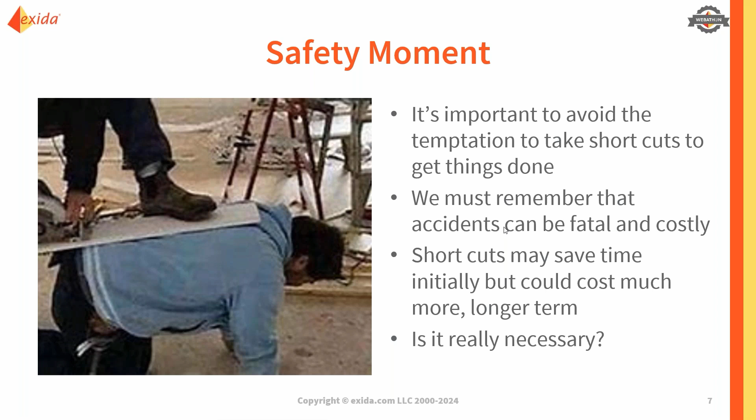And oftentimes I come across this a lot, where people are trying to save money and thinking that they can cut corners, they can delay doing the maintenance, delay doing the proof testing, and all of that, because they think, is it really necessary to do that? And the trouble is, it is necessary to do that if you want to maintain your risk.

So, coming on to the main point of this webinar today, another question I often get asked is what is mission time? What do we mean by mission time? Mission time is sort of a throwback from the Second World War, where when the bombers needed to go off on their missions, the engines had to be reliable enough to carry them there and bring them back. So this concept of mission time has stuck.

And from the 61511 point of view now, we require that the time we expect a set of SIF equipment to work before a major overhaul or replacement needs to be stated. And this is what we refer to as the mission time. And the other thing is, the end user should be specifying what the mission time is, because it will be a factor involving their normal practices.

So what are the end user practices when it comes to the mission time? For example, it could be that they have a 5-year turnaround, and so you might set the mission time at 5 years, or you could set the mission time against your valves, for example. So if your major cost is the refurbishment or replacement of valves, then you might set it for that, which could be 10 years, for example. Others might say, well, we'll have to change out the logic solver in 15 years, so that's going to be a major change, so we should set our mission time at 15. Others arbitrarily set it at 30 years. But the point is, it's the end user that needs to determine that, and not the engineering company, because the end user has to obviously track and maintain that.

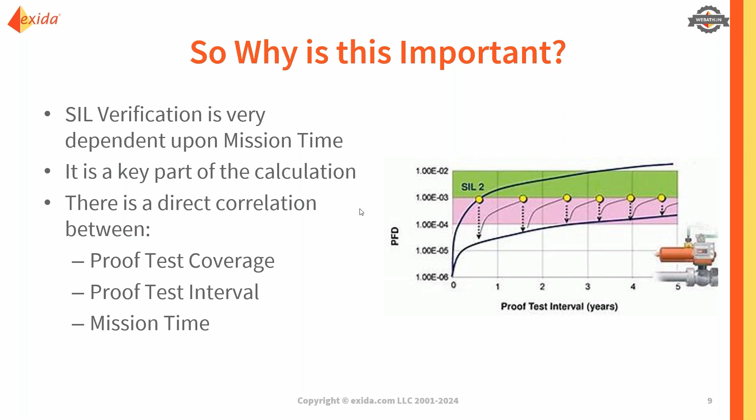So why is mission time important? It's important because SIL verification is very dependent upon mission time when we're not assuming perfect proof testing. And I'll talk about that in a minute. It is a key part of the calculation. And as we shall see, there's a direct correlation with proof test coverage. What we mean by proof test coverage is the ability of a proof test to help us find dangerous failures, the interval, how often we are going to proof test, in conjunction with the overall mission time. So like I said, SIL verification does depend on a number of variables. These three are part of that, and they're an important part of that.

So just to refresh our memories on what we mean by proof testing. The purpose of a proof test is to help us find any dangerous undetected failures that the automatic diagnostics have not been able to find. It's not to prove that the SIF works. And this is why it's very important that if you don't have a tool like exSILentia, which has this information in it, you need to look at the recommended proof test from the manufacturer.

Now, of course, a safety instrumented function is made up of multiple pieces of equipment, and those pieces of equipment will all have different requirements in terms of proof testing. So you need the safety manual, because the safety manual will have a recommended proof test to achieve a certain coverage for finding dangerous failures. So it's important that you have access to that safety manual. And very often when I talk to end users and even when teaching the classes, when I ask the question, do you have your safety manuals?

And some clients say, yes, we have the safety manuals, but others say, no, we don't. And the thing is, when it comes to certification, IEC 61508 specifies that there should be the proper end user documentation, which is a safety manual. The thing is, it doesn't necessarily mean that they will give it free of charge. And indeed, some suppliers will charge for certain portions of the safety manual. The safety manual could also be part of some other documentation as well.

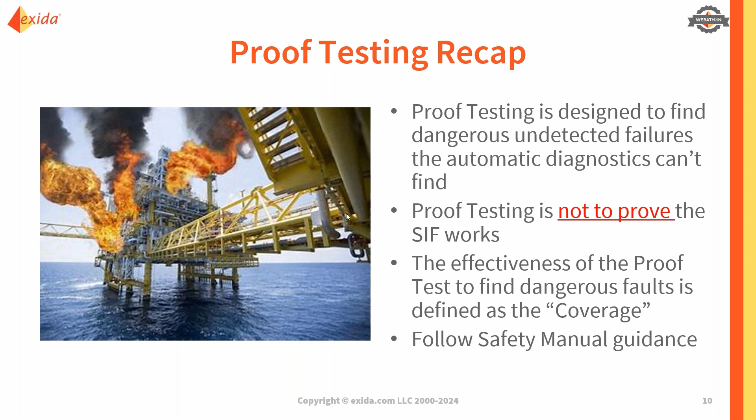But the point is that you have to make sure your purchasing people, when they order the equipment, also specify a safety manual has to be supplied. Because as I've said, we would need to study the safety manuals and come up with an overall proof test for the SIF based on the equipment that we're using. So this effectiveness, the proof test coverage, is referred to. That is how effective is our proof test at helping us to find dangerous failures. And as I've said, we need that safety manual to be able to follow that guidance. This is very important

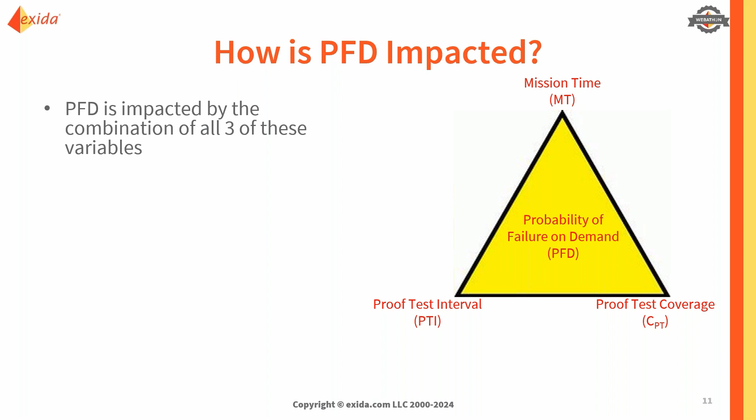because, again, coming back to my point about how is the PFD impacted by these three variables. Mission time in conjunction with the proof test interval, in conjunction with the proof test coverage. These three. And it will be impacted by a combination of all of these three. Now, if we consider the simplified equation for probability of failure, and this is a simple formula. During useful life, and again, as I've said, there's another webinar that covers the reason why we have to track useful life. But during useful life, we can claim constant failure, in which case we can say that the probability of failure for the SIF is going to be the failure rate times the time interval. So this is at its simplest form.

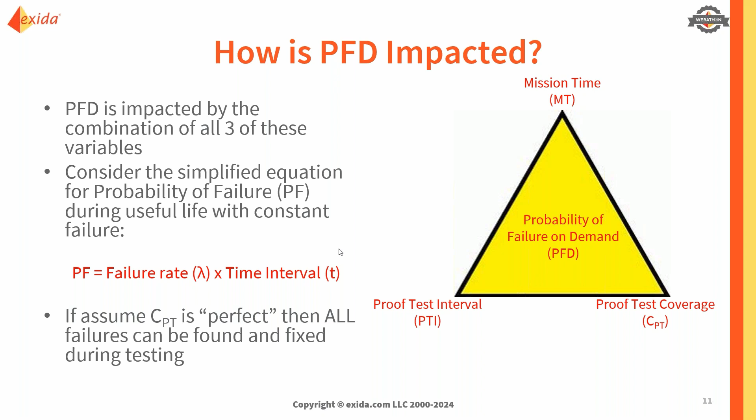And this is based on the premise of perfect proof testing. What do we mean by perfect proof testing? If we assume that the coverage for dangerous failures is perfect, then what we're saying is that we can find and fix all the dangerous failures during testing. This is a fallacy, of course. It's not possible to claim that we can find and fix all dangerous failures. And this is very important because if we consider perfect proof testing, it means that mission time has absolutely no bearing on it.

Because again, if our coverage for dangerous failures, which is obviously going to be a function of the dangerous failure rate, known as lambda d, then we simply would be saying that our PFD in this case, probability of failing dangerous, would be a function of lambda d times Ti. The mission time has no bearing, because what we're implying is if we can find and fix all the dangerous failures when we test, what does that do to our PFD? Well, it basically means the PFD is 0. We found and fixed all the problems, so we don't have any probability of failing on demand after each test. So effectively, we're resetting to 0 every time we do a test. So this is a fallacy, and it's completely unrealistic, because there's no such thing as a perfect proof test. And the PFD average, of course, which is half the PFD, would be the same, lambda d times Ti over 2 in this case, if we assume perfect proof testing.

However, if we come back to the real world, if our proof test coverage is not perfect, then we cannot simply say that our PFD is lambda d times Ti, or our PFD average is lambda d times Ti over 2. Because now we can't find and fix all the dangerous failures. So instead of returning to 0, the PFD will not return to 0. It'll be at some level above 0.

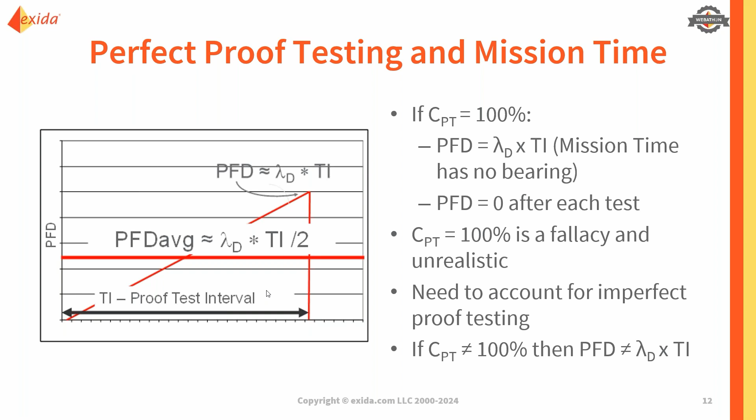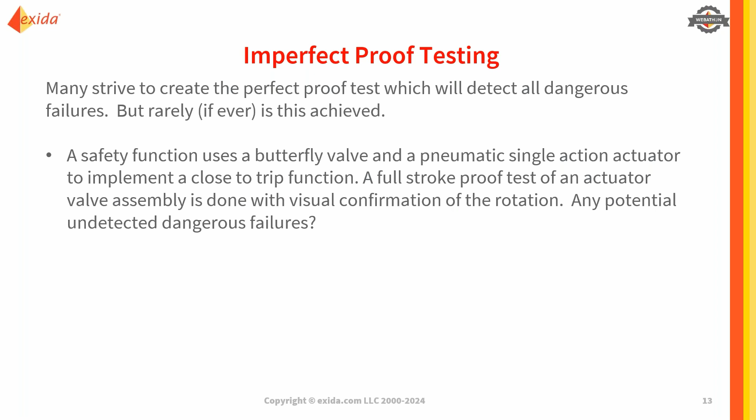And this is often a conversation I've had in the past with different clients. If you think of it this way, if we consider a safety function has a butterfly valve, a pneumatic single action actuator, and it's implementing a close to trip function, even if we do a full stroke proof test of the actuator valve assembly, and we confirm that there has been rotation, are there still any potentially dangerous failures? And of course, the answer is yes, there are, because we don't know what's going on inside the valve. There could be a damaged shaft, there could be damaged seals, there could be damaged butterflies. So we cannot say that a full stroke is 100%, and I have heard people say full stroke is 100%. There's absolutely no way you can say it's 100%. Because as we shall see, if you assume perfect proof testing, you're just fooling yourself.

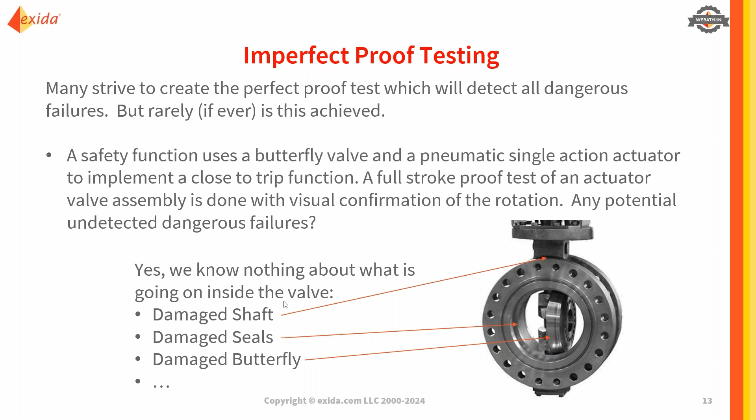So we know then, if we have perfect proof testing, that the assumption is the PFD will be 0 after every single test, and mission time has absolutely no bearing. But now if we accept the premise that there is no such thing as perfect proof testing, we have to consider the mission time. Because if our CPT is not 100%, then of course the PFD is not going to be 0 after the proof test has been completed. And therefore our simple formula has to account for imperfect proof testing.

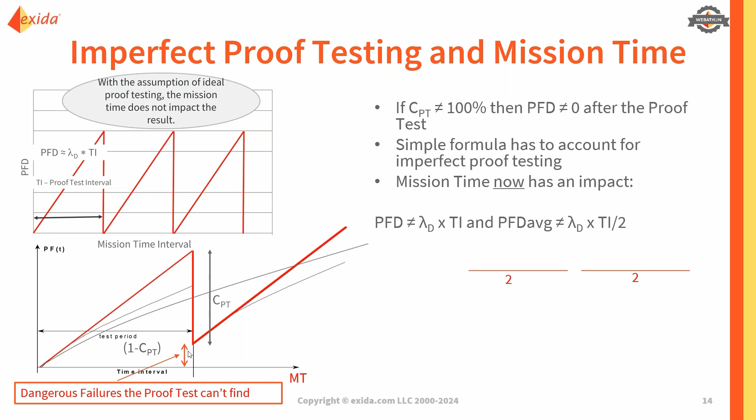And mission time now has an impact, because we can't say PFD is simply going to be lambda d times Ti, or PFD average is lambda d times Ti over 2. Because instead of it going back to 0, we're going to have a portion here that we can't find every time we do a proof test. And using our complement rule, if we said that the coverage factor was 80%, that means that we can't find 20% every time we test. So this will be dangerous failures that the proof test can't find. So now we have to account for that. And this is going to be cumulative over the mission time.

So it's no longer simply going to be lambda d times Ti over 2. We have to take into consideration the coverage. So the dangerous failures we can find are governed by CPT times the dangerous failure rate times the proof test interval. But now we have to add in the dangerous failures we can't find, which is governed by 1 minus CPT, over the mission time. So now we have to include the mission time. So you can see mission time now will have a direct bearing when we don't have perfect proof testing.

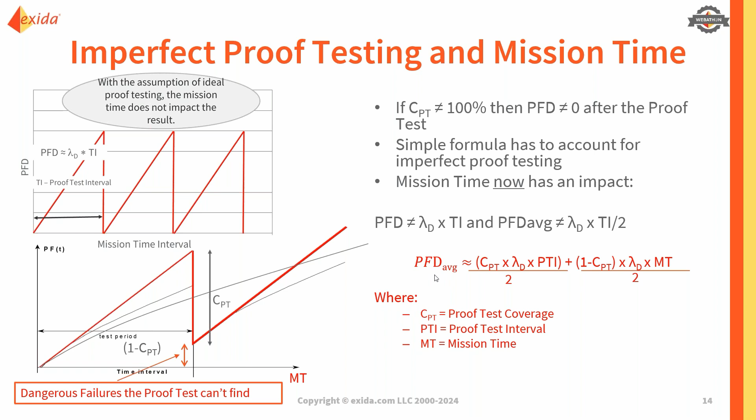So to illustrate that, let's consider a simple example. Let's say that lambda d is 2 times 10 to the minus 7 failures per hour, or 200 FITs. Our proof test interval is 10,000 hours. In this case, we're saying our coverage is 90%, and our mission time is defined as 200,000 hours. So, using our simple approximation equation, we need to compare the result with the perfect proof testing. So, of course, if we assume perfect proof testing, we've got the same failure rate. We have a test interval of 10,000 hours. Our CPT now is 100%, and our mission time is still 200,000 hours.

So let's look at the first. Using our simplified formula for imperfect proof testing, where we're taking into consideration the failures we can't find, we plug in our numbers. So we have our coverage factor, which is 90% or 0.9, times the failure rate, which is 2 times 10 to the minus 7, times the test interval, which is 10,000, or 10 to the 4. So the 2's will cancel here, and 10 to the minus 7 times 10 to the 4 is 10 to the minus 3, so it's going to be 0.9 times 10 to the minus 3 on this side. Over here, we have 1 minus 0.9, which of course is 0.1. The 2's cancel out again, so now we've got 0.1 times 2, which is 0.2. 10 to the minus 7 times 10 to the 5 is 10 to the minus 2. So now we have 0.002. And if we add those two together, we get 0.0029. And if we invert that to get our RRF, so RRF is approximately 1 over PFD average, we get 345, which would say this was a lowish SIL2.

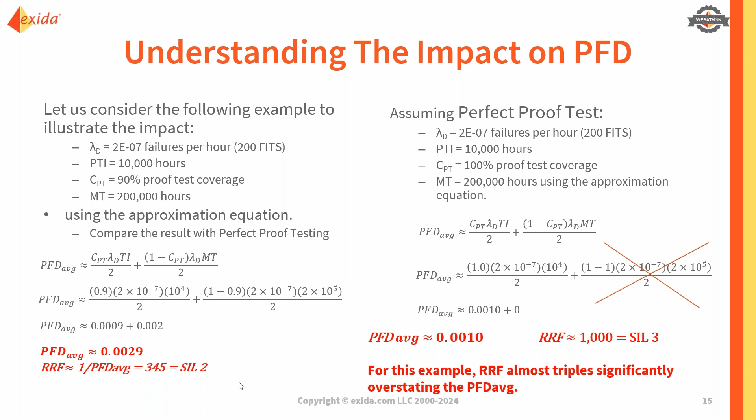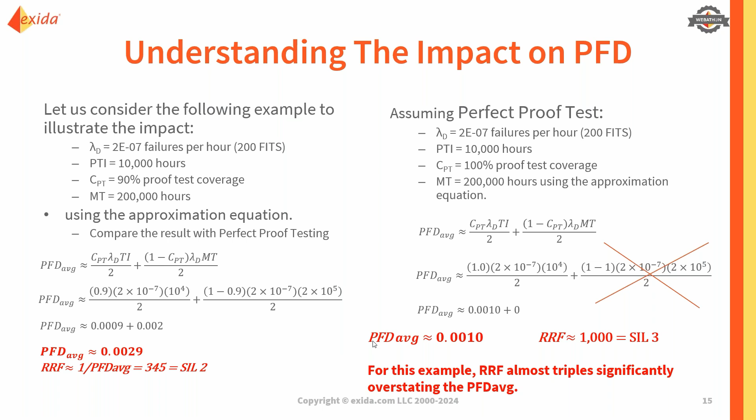So you can see, and this is the difference between 90% and 100%, which is only 10%, we're almost overstating our risk reduction factor by 3 times. So this is why I say, if you assume perfect proof testing, you're just fooling yourself, because you're overstating the risk reduction you can achieve by not using realistic numbers. And you can see here, almost 3 times. Why would we want to do that? We're just completely overstating the amount of risk reduction we have. So this is very important. So we need to understand that.

Let's take another example. Let's just assume a very simple high pressure protection SIF, which is simply going to be a pressure switch, solenoid valve with a manual reset, an actuator and a ball valve. And let's say the SRS requirements were for this to achieve a SIL2 with a risk reduction factor of greater than 110. And in this case, we're setting the proof test interval at 3 years, which is fixed based on the plant turnaround.

The mission time is defined as 30 years. We'll use a 90% coverage factor. There's a manual reset and it's hardwired, so there's no logic solver. So this is fairly simple and straightforward.

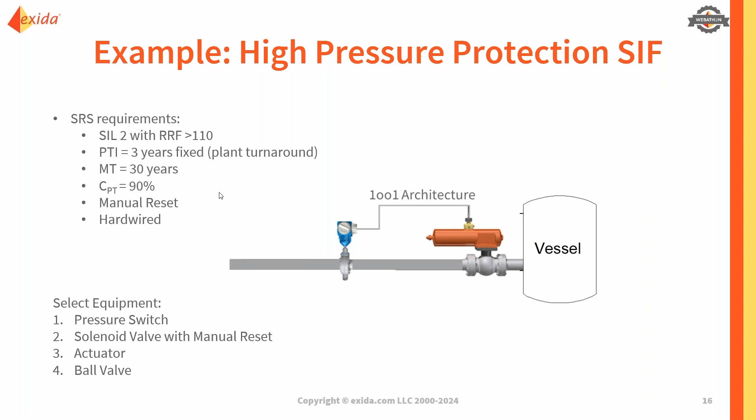Now, if we look at this in exSILentia, the mission time becomes an important part of this with imperfect proof testing, as I've said. And here you can see there's our mission time of 30 years. So the SIL target is SIL2 with an RRF of 110. Now, based on this design, we can only achieve a risk reduction factor of 35.9. So we're well off our target. And you can see over here that the final element is the main contributor to the PFD average because we're using a single set. So this is where we would obviously need to focus our attention.

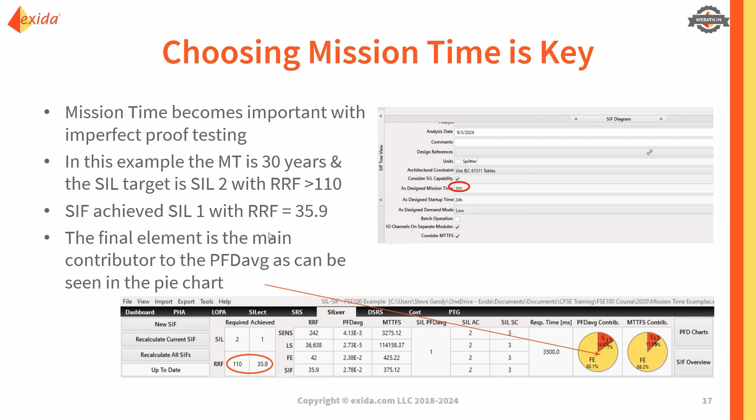So in our example, we have a fixed 3-year proof test interval that's set by operation, so we can't move that. And here again, I always tell designers, don't design in isolation. You need to go and talk to the O&M guys and find out what the end user practices are. We had a case where a client came to us because in order for the engineering company to meet the SIL target, they had set the proof test interval at 3 months. And of course, the end user said, there's absolutely no way we can do 3 months. So we need to make sure we understand the operating conditions and of course the practices.

Even with a 90% coverage, we can't meet target. So what are our options? We could look to increase our proof test coverage, but at 90%, the chances of improving it significantly are not going to happen. We could include partial stroking. Now here again, when we are considering low demand operation, and especially with the final elements, we are concerned with failures such as stiction, cold welding, binding. All of these are dangerous, especially when the valve isn't moved for long periods of time. So if we can move the valve, even a little bit, we know it's not stuck. And that can obviously alleviate quite a few of the dangerous failures.

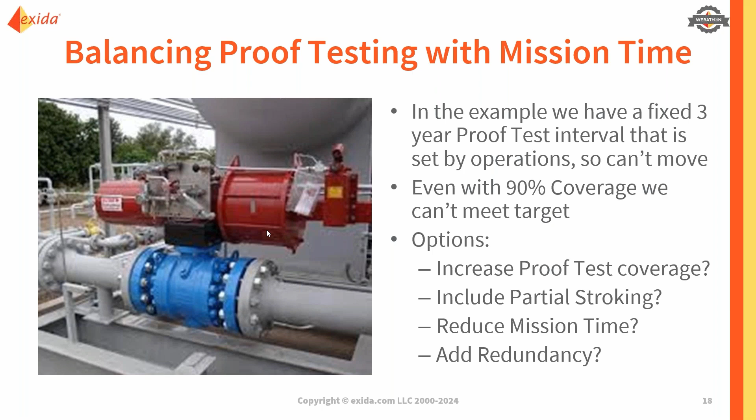Now, will it properly close? Will it properly seat? That's a different matter. And if the device is capable of being partially stroked, and of course the process is such that we can move the valve, usually the manufacturers will say you could move it between 10 and 15%. It really depends upon the device and of course the application. But if you can move it, then you can obviously eliminate some of the dangerous failures. Not all of them, but quite a few. So that's one thing we could look at doing. And we could also look at reducing the mission time, of course, or we could add redundancy. So the simplest thing to begin with would be to add in partial valve stroking.

So we can see here, if we set it up to do partial valve stroking automatically every 5 days, it gets us to 71.8. So we've more or less doubled what we had before, but we're still way off 110. So obviously partial stroking on its own is not going to help. The next step would be to see if we could reduce the mission time, because we don't necessarily want to jump straight away to adding redundancy, if we can help it. And according to the 61511 table, with a hardware fault tolerance of 0, we should still be able to achieve SIL2.

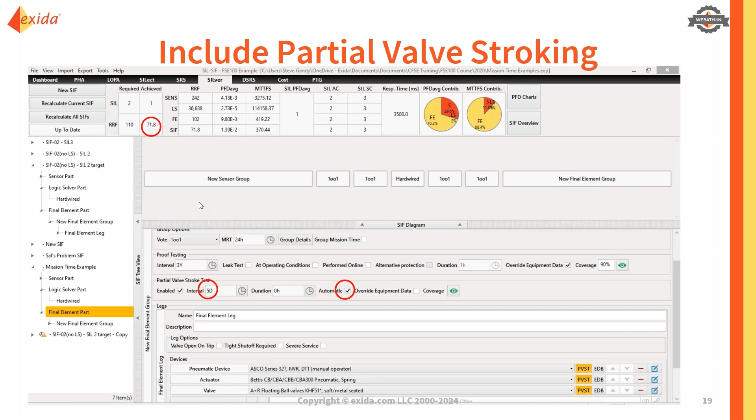So if we look here, if we reduce our mission time down to 10 years, and that coincidentally happens to be the useful life of this particular valve, then you can see we've actually achieved our target. We've got to 113, which is above our 110. So obviously with partial valve stroking and the mission time set at 10 years, we could achieve our target.

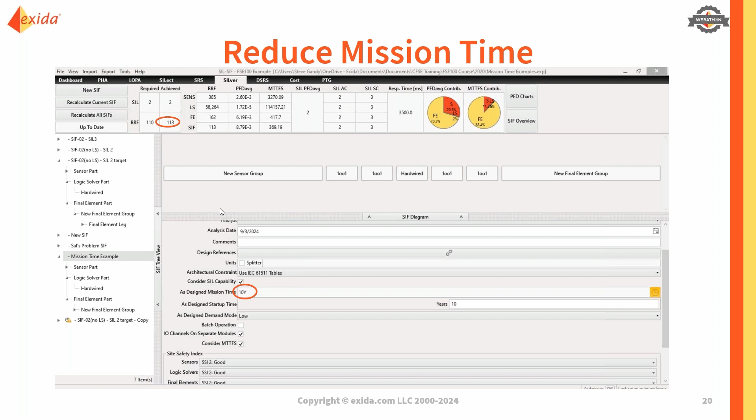If we can't reduce the mission time, if we leave the mission time at 30 years, then we have no choice but to go to a redundant architecture because we're stuck with our 3 years. If we can't move the 3 years, and oftentimes that happens, we've had clients that say, well, one particular case, it's every 4 years, and we're not going to change that. So of course, that is going to be one of your 3 variables that's going to impact. And that means we've got the other 2.

Now, if proof test coverage is relatively high and we're not getting there, then if we can move the mission time, that's fine. If we can't move the mission time, then we're pushed to go to a 1 out of 2 because it's the final element that was contributing to the PFD average. And you can see we don't need the partial valve stroking in this case, and we can get to 136. So we can still meet our target.

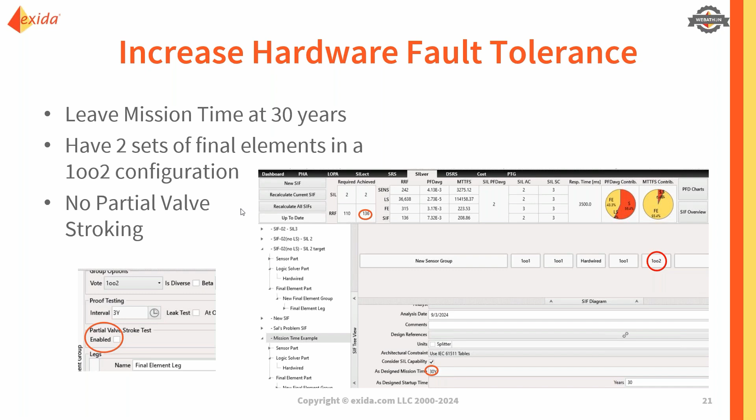So like I said, those 3 together, looking at the proof test interval, the proof test coverage, and the mission time is very important. Those are not the only 3 things that influence the PFD average. There are 9 variables in all, but these 3 are also very, very important. Okay, so let's just summarize this. Understanding the relationship between those 3 is very important.

So when it comes to setting proof test intervals, from the designer's point of view who's designing the SIF, they need to understand what are the end user practices. Do they have determined shutdowns that they use to do this, turnarounds? In which case that has to be one of the factors. Making sure that we don't assume perfect proof testing, because you saw what happens if we do that, and then looking at what we can achieve as a coverage and balance that with the mission time.

So as I've said, the mission time selection is the end user's, and that will be based upon how they view things. Now, oftentimes they don't understand this relationship, and that's where guidance is obviously important, understanding it, hopefully educating so people understand that these things do have an impact. And of course, the higher the SIL that you need for your SIF, the more critical this relationship is to meet target.

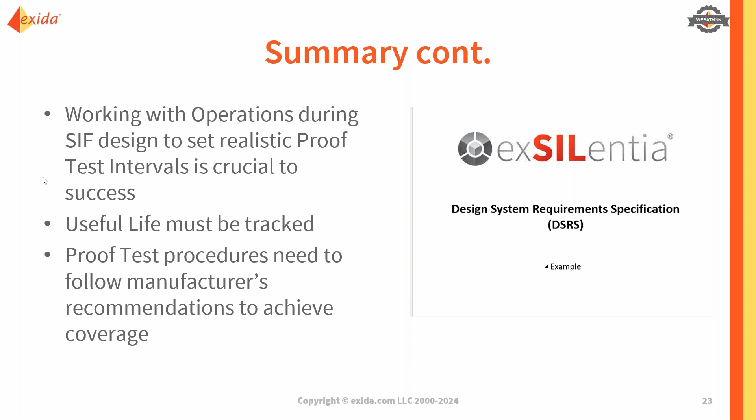And I see that there are some questions brewing, so we'll get to that. Let me see what we have here. Okay.

So this one says, under reliability considerations of the components like shaft or seat of the butterfly valve, fail to trip actuator spring will make sure to close the valve, and this proof testing is 100%. No, it's not 100%. You can't claim 100%. Same issue as I said. You don't know what's going on inside.

So when I say imperfect, I mean it's not 100%. It'll be some percentage, but not 100%. Then what will be the effect in voting system 1 out of 2, 2 out of 2, 2 out of 3? Well, as I explained to you, if you have redundancy, depending upon the type of configuration you've got to start with, as I showed you in this example, you can meet the target.

So that's an option. And as I said, if we balance that out, if we can't move the mission time, if we can't move the proof test interval, and we can't improve the proof test coverage, then that's probably the only option we've got, if partial valve stroking isn't going to help.